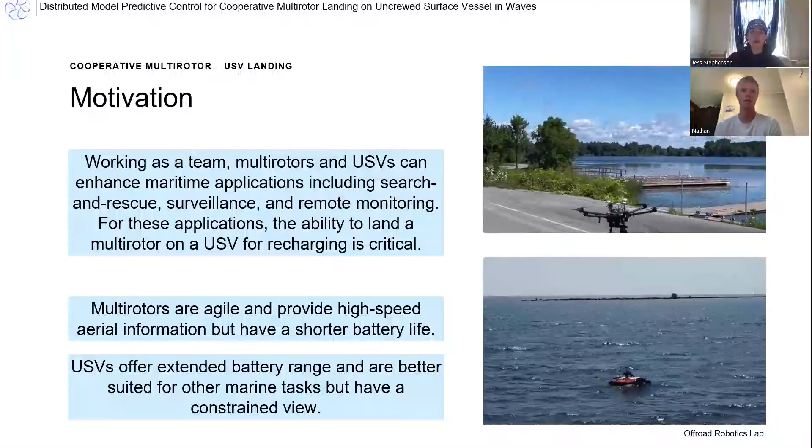Autonomous landing of a multi-rotor on a USV presents two main challenges. Firstly, it requires safe and reliable performance despite limited communication between vehicles and in cases of communication loss. Secondly, when the surface vessel encounters rough water conditions, the location and timing of the landing is critical to prevent damage to the multi-rotor due to the tilt of the USV at touchdown.

Given these challenges, our work will solve the autonomous landing problem and consensus problem in challenging wave conditions while minimizing shared information.

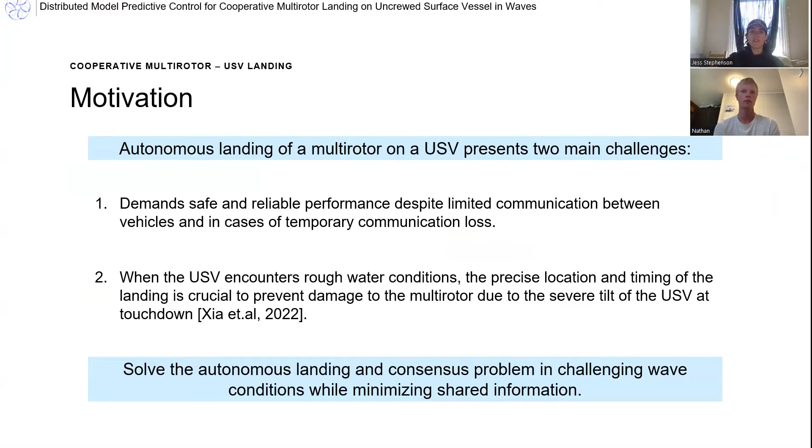Model predictive control is a common strategy for multi-rotor landing tasks. One proven approach is a centralized MPC. However, this approach does have some limitations. Firstly, it is vulnerable to communication breaks and delays as it requires communication with a single centralized station. Additionally, it involves solving a larger optimization problem, which is generally slow and computationally expensive.

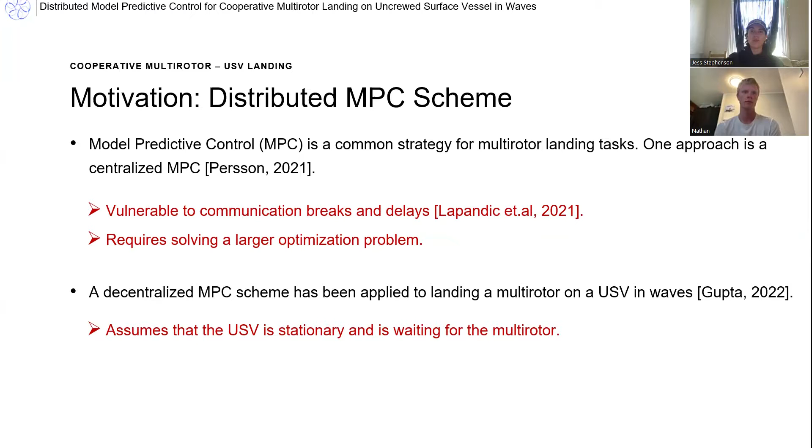Another approach is a decentralized MPC scheme, which requires no communication between vehicles. Although this has been shown to be effective in landing a multi-rotor on the USV, the work assumes that the USV is stationary in space and waits for the multi-rotor.

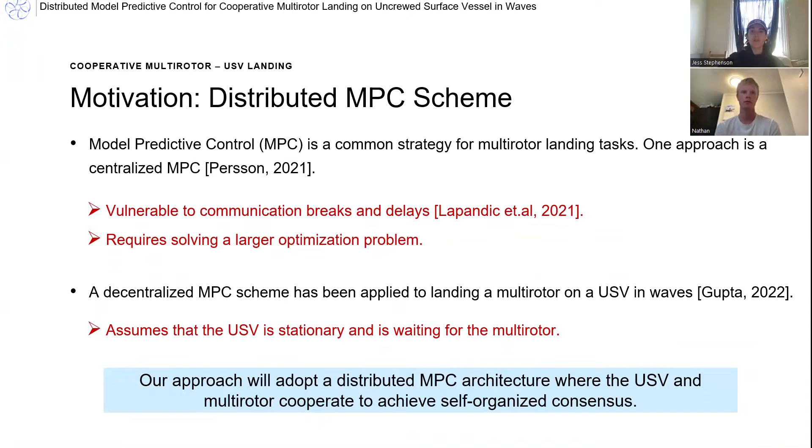Considering the limitations of these previous studies, our approach will adopt a distributed MPC architecture where the USV and multi-rotor cooperate to achieve a self-organized consensus.

A distributed MPC scheme has been applied in other work to landing a multi-rotor on both an unmanned ground vehicle and on a USV. However, the landing was treated as a rendezvous problem where both vehicles were required to converge to a specific location and time. The rendezvous point was known a priori or could be updated online.

Additionally, the vehicles shared their planned or optimized trajectories. In order to maintain lightweight communication and adaptability, in our approach, the consensus location will not be known a priori and vehicles will not share their planned trajectories.

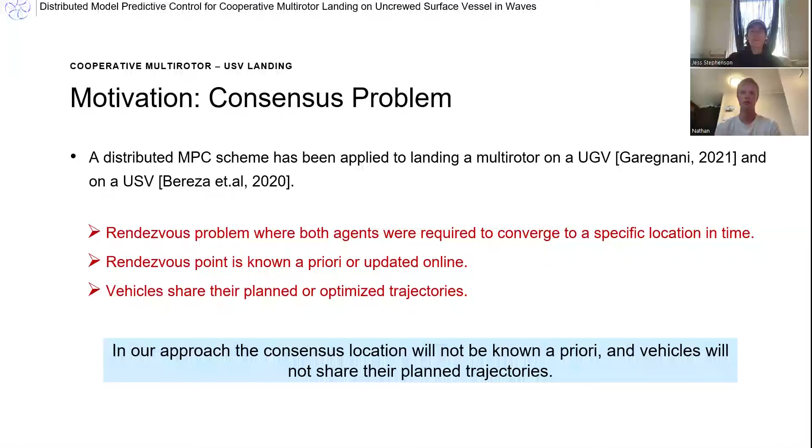So building off that, the key idea of our approach to this problem is to treat the landing as a consensus issue, in that both vehicles will have different goal locations that will be iteratively shared amongst each other and used to update their states and goals until they reach a consensus landing.

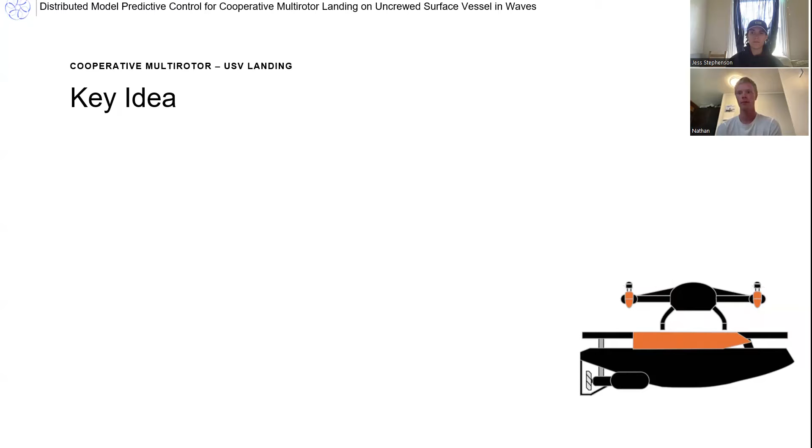In this work, we developed a model predictive control framework for safe multi-rotor USV cooperative landings that will leverage the agent's position within a spatial temporal wave model. We show in simulation how our approach can simultaneously coordinate in real time both a safe landing location and execute the landing tasks for a multi-rotor to a USV within harsh wave conditions.

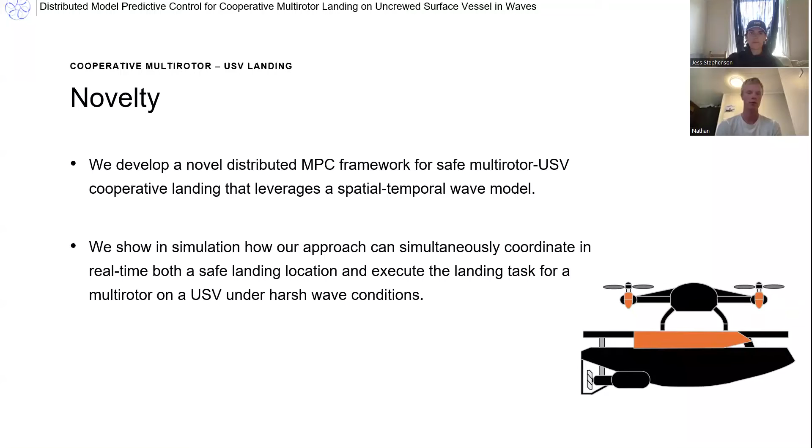Our approach for the MPC utilizes three terms, the first being a standard tracking term, J-track, that compares the agent's true position to its artificial goal and relative control inputs. This MPC is augmented by two other terms we created for this project: a co-op term, which compares the artificial goals of both agents, and a tilt term representing the local environment of the agent's goal within the wave model.

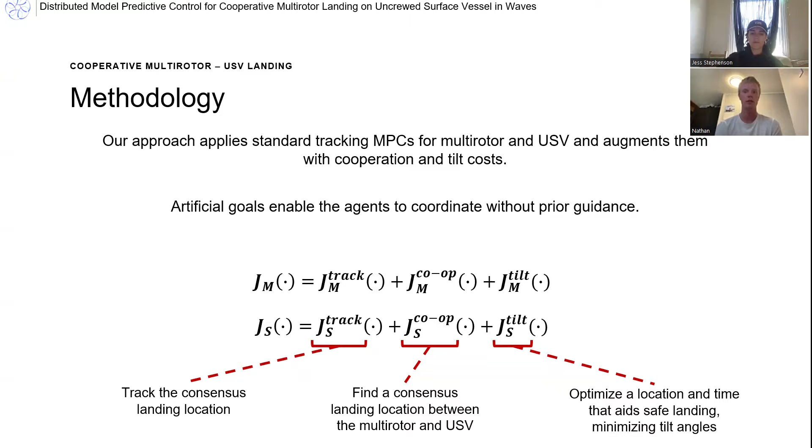We'll also be using the subscript M to denote terms related to the multi-rotor and subscript S to relate to the USV.

JM track and JS track are standard quadratic tracking costs for the multi-rotor and the USV respectively. Specifically, the tracking cost sums over the prediction horizon the position error between the vehicle position and its goal, and the control effort on the vehicle U. QM and RM are positive definite matrices that weight position error and control effort. The tracking cost JS for the USV below has the same structure.

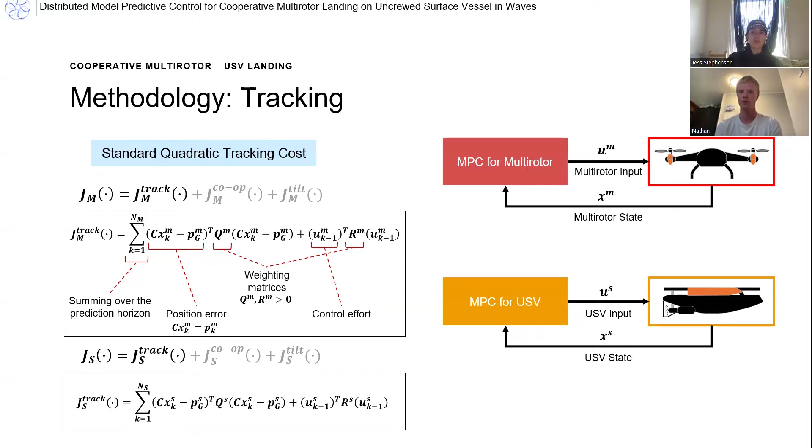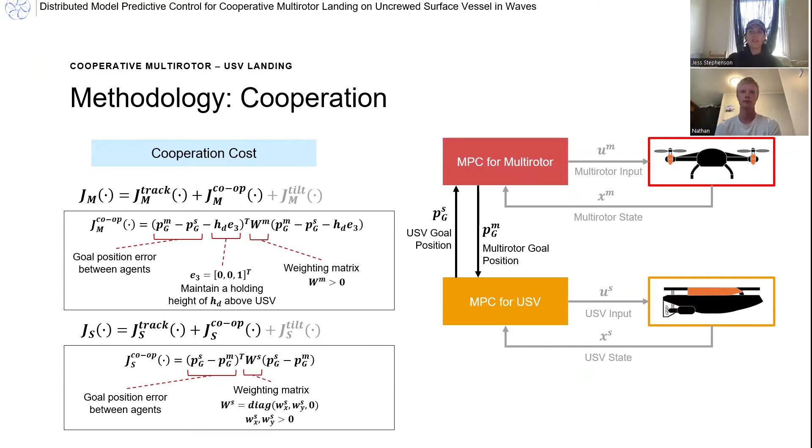Next, we include a cooperation cost, JM co-op and JS co-op. Each time step, the multi-rotor receives the USV's current goal and optimizes its own goal location to cooperate with the USV through JM co-op. The cooperation cost considers the goal position error between agents plus a holding height HD that the multi-rotor must maintain above the USV before landing. This and other constraints on the altitude prevent the multi-rotor from dipping below the boat.

The cooperation cost for the USV, JS co-op, is similar to JM co-op, as at each time step the USV receives the multi-rotor's current goal and optimizes its own goal location to cooperate. WM and WS are positive definite matrices that weight goal position error between agents. In the MPC, we are now optimizing both the trajectory as before, as well as the goal position.

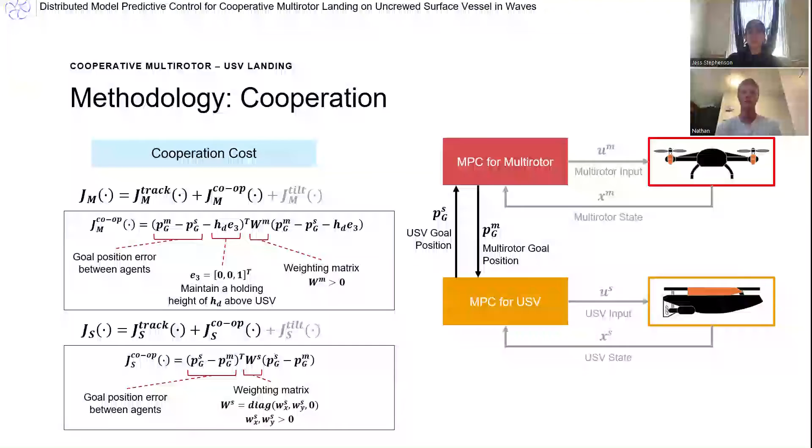The final term of our MPC utilizes a spatial temporal wave model that outputs a wave's tilt angle squared. In the USV's MPC, this term's purpose is to optimize the surface tilt angle at the USV's goal location within the wave model. The wave model itself is passed the agent's goal as an X and Y vector and a query time, and the output of that wave model is averaged over the wave's time period. For this term, the weighting matrix is represented by lambda.

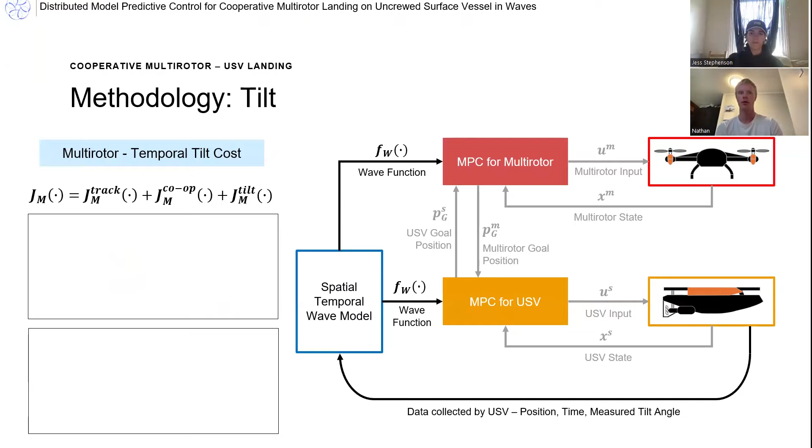With regards to the multi-rotor agent, the tilt term is used to time the descent of the multi-rotor. Before the term is activated, the multi-rotor will hover at a set height above the wave crest. Then activation is determined by the multi-rotor's internal goals as well as information received from the USV.

The three criteria for activation are that the USV is at its current goal, the multi-rotor is at its current goal, and that the multi-rotor goal and the USV goal have reasonably converged. Together, these three criteria also imply that the true position of the multi-rotor has nearly converged to the true position of the USV.

In the multi-rotor's tilt term, we sum the wave's square tilt at the goal location over the MPC's horizon. This term includes a static weighting matrix similar to the USV's term, but also includes a dynamic weighting function, h of e gz, which is based on the multi-rotor's relative altitude.

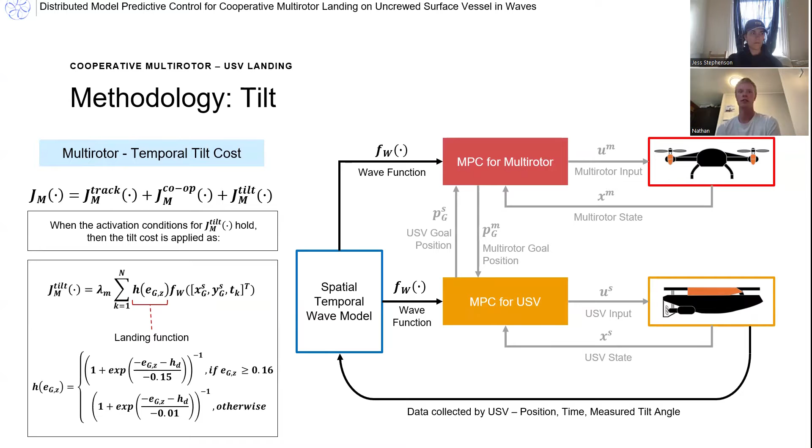At normal hovering altitude, the tilt term is dominated by the lambda weight matrix. However, when the relative altitude reaches about 16 centimeters, this represents a commitment point for the multi-rotor, where the weighting of this h function rapidly decreases and causes the multi-rotor to commit to a landing at that location, regardless of future changes in the wave model.

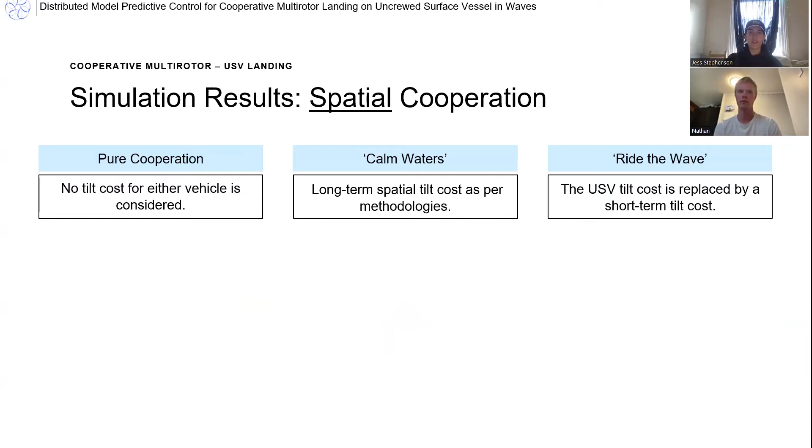Spatial cooperation of the proposed distributed MPC is shown under three strategies. Firstly, the purely cooperative strategy, where no tilt cost, J-tilt, for either vehicle is considered. Secondly, the calm water strategy that leverages the novel spatial tilt costs derived previously. And finally, the ride the wave strategy that replaces the spatial tilt cost with a short-term tilt cost that considers only the current tilt of the USV instead of taking the mean square across the wave period.

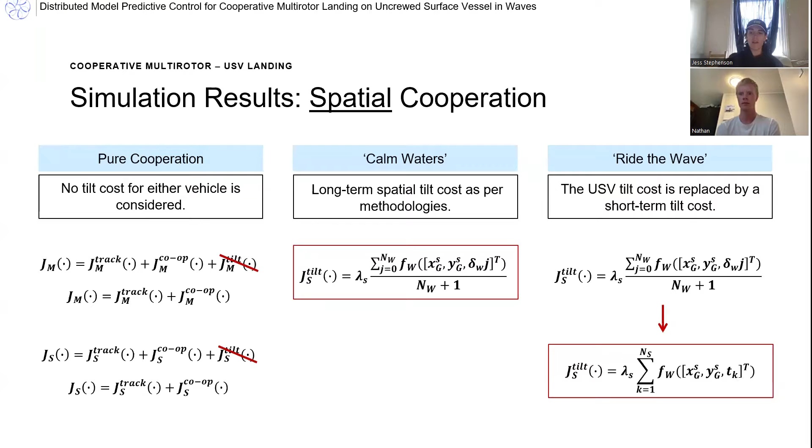The purely cooperative strategy reaches a consensus landing location relatively quickly as the vehicles track their own goals and consider each other's goals through the cooperation cost. However, we observe that the agents do not account for the USV tilt at the location, which results in an unsafe tilt angle in severe waves when the multi-rotor descends to the USV.

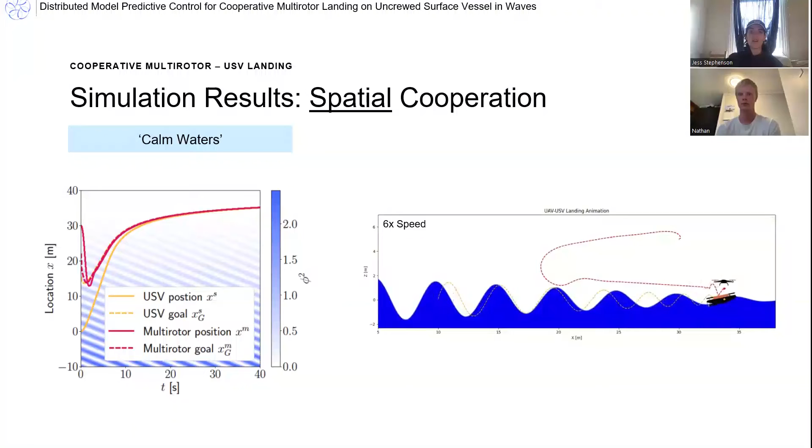Our proposed calm water strategy initially shows a similar trajectory to that of the purely cooperative strategy as the vehicles prioritize cooperation. However, in this strategy, the USV goal shifts to the right-hand side to minimize average tilt angle. We can see how tilt cost is driving both agents towards calmer waters. Once tilt cost is minimized, the USV and multi-rotor cooperate and the multi-rotor can land in the calmer waters.

In the ride the wave strategy, the tilt cost is replaced with a short-term tilt cost where the summing window, NS, is less than the period of the wave. In this strategy, once the two agents converge to the same location, their goals will settle on the nearest wave crest or trough, and then follow that point as the wave moves.

It'll stick within this point as regions at the extremities are unfavorable with rising and falling edges of the wave. As the agent's goal position follows the crest of the wave, the agent's MPC optimizes a path to reach the goal within its horizon. And as the goal is continually moving, the agents continually persist a few steps behind their goal, so this strategy requires more work to overcome this lag.

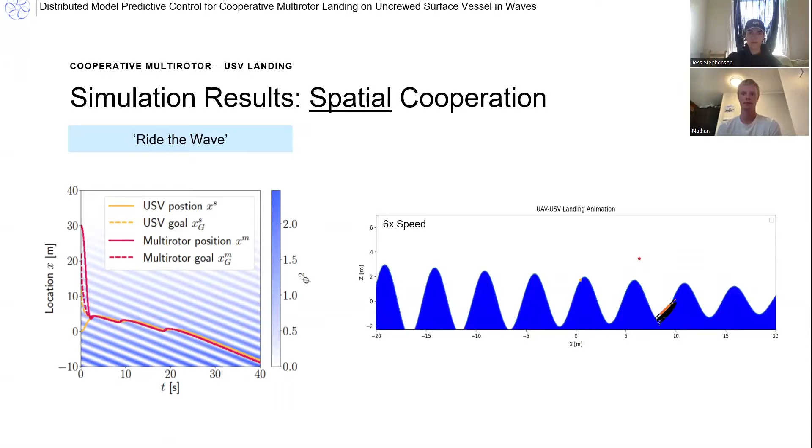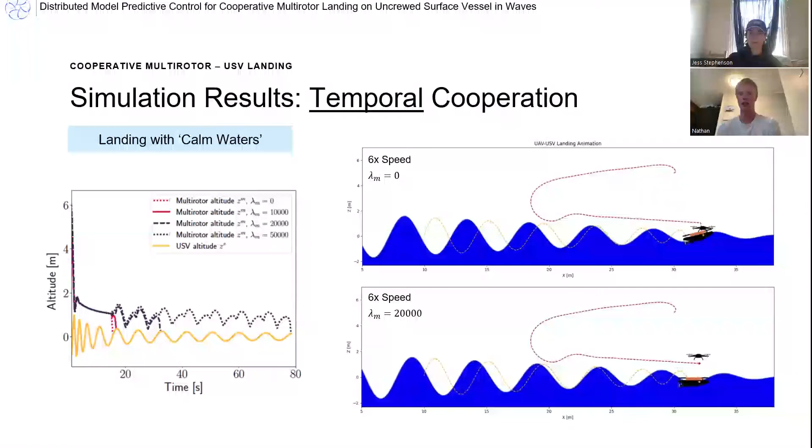The figure on the left side of the screen shows the altitude of the agents over time, and shows the same weighting conditions as before, as well as a few others.

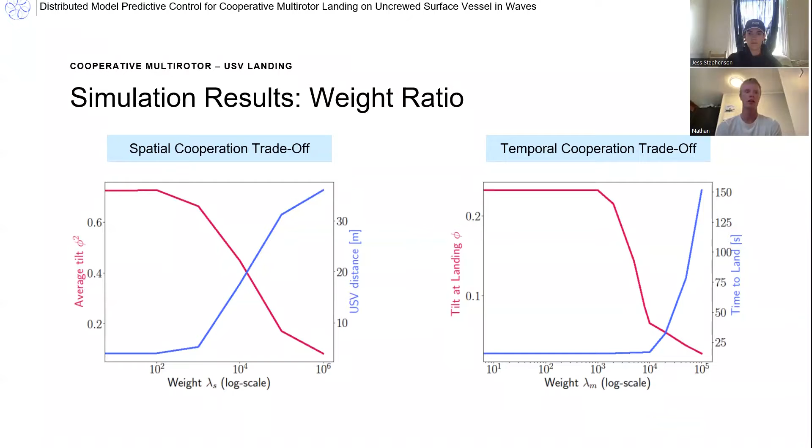And waiting past that point for further crests or troughs for smoother waves does improve the landing angle, but the agents tend to slow down as there's less incentive to move to calmer waters, and improvements in tilt angle take more time.

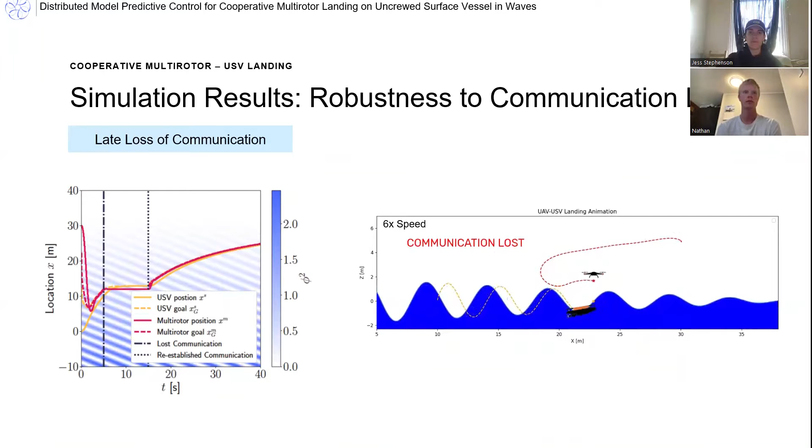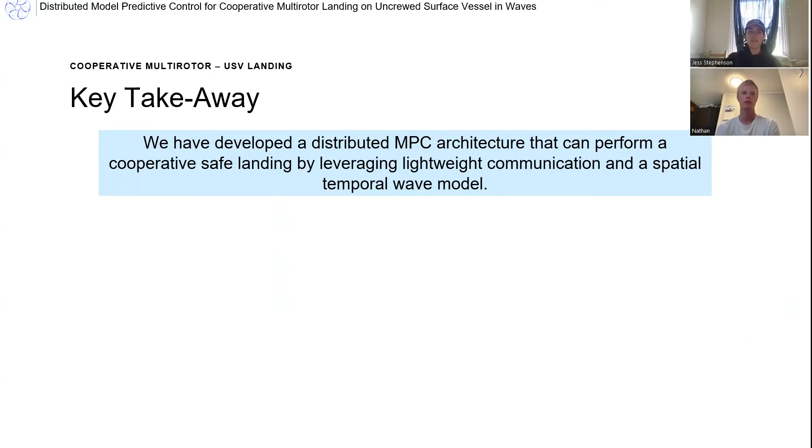In summary, we have developed a distributed MPC architecture that can perform a cooperative safe landing by leveraging both lightweight communication and a spatial temporal wave model. This architecture can easily augment existing tracking MPC techniques for multirotors and USVs.

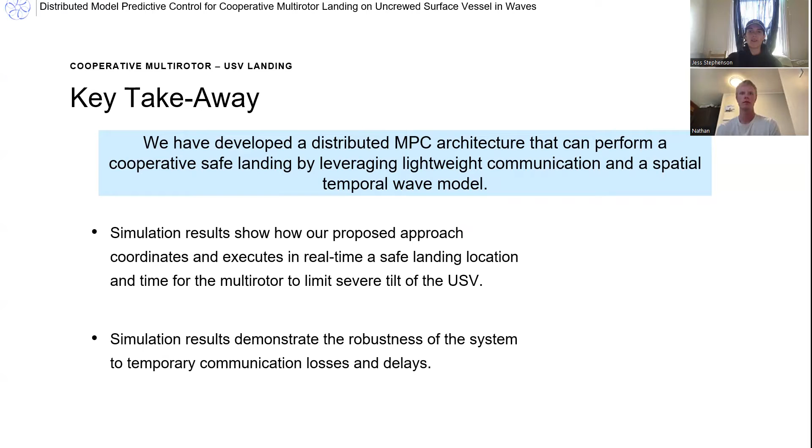Simulation results show how our proposed approach coordinates and executes in real time a safe landing location and time for the multirotor to limit severe tilt of the USV. Additionally, the simulation results demonstrate the robustness of the system to temporary communication losses and delays.